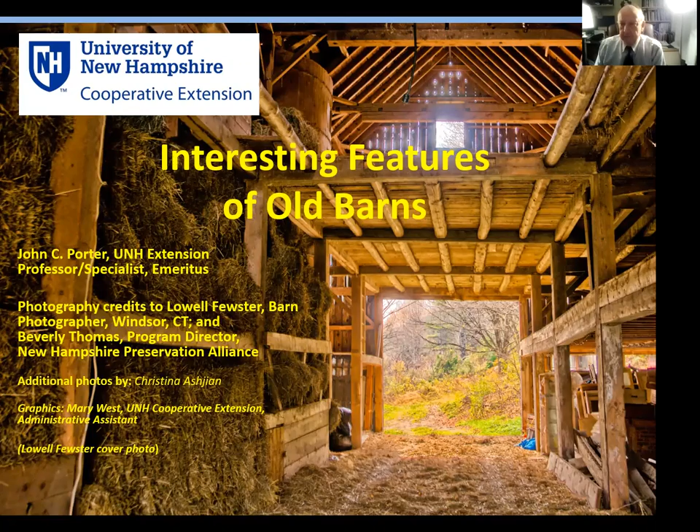People, as I gave my other lecture, were asking questions or looking puzzled about some of these things I talked about with barns, and I realized a lot of people hadn't seen the inside and didn't know some of these features. So I've split it up into some different categories, and I'm going to start with architectural features.

And you've got to start with the framework of what we call the bones. If we go into a barn, you just can't help but be impressed with the framework, the size, the scale, the beams. These were very ruggedly built.

They were overbuilt. In fact, some people wondered why they used such big timbers. But I think one reason was it meant you didn't have to hew so much, because they were dealing with big lumber when they came to this region. Big timbers meant less hewing, and so they used these big structures.

They built bents, that's what these units are called. Every 12 foot, there'd be a vertical post and so forth. And it's just a tremendously strong structure. In fact, some of these could actually be moved, just by towing them as a box, because they were so tight.

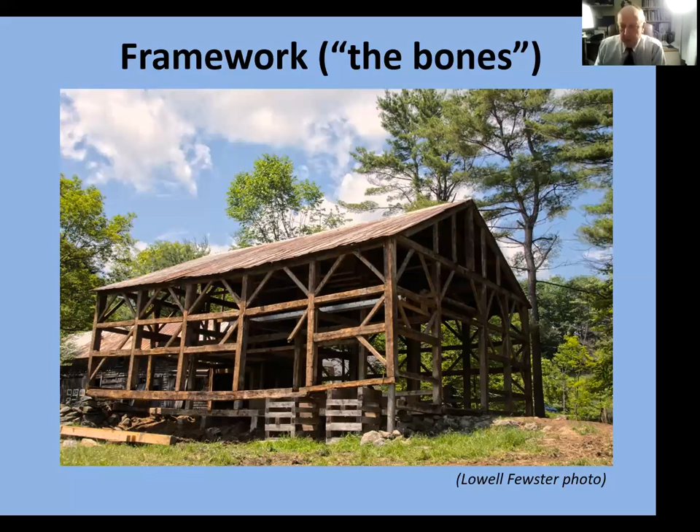Inside, on the side you're seeing here, the gunstock post, this is where they flared them out at the top, so they intersected with the roof members and the rafters. It gave more meat for the intersection of many members.

You had roof bracing that would support the structure. Every barn had its unique things, but basically the early barns had this post and beam. With the real early ones, you had the major rafters with purlins going horizontally and the boards going up and down. The one shown in this picture on roof bracing was a later barn, and this is what we call the common rafter, and now they're starting to put the boards horizontal.

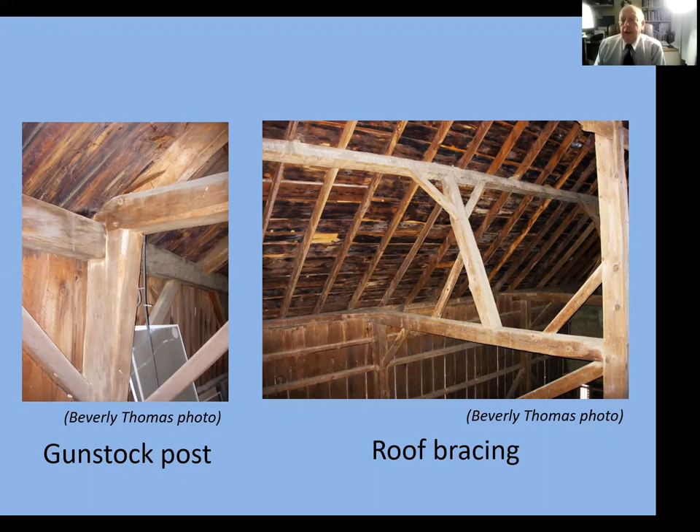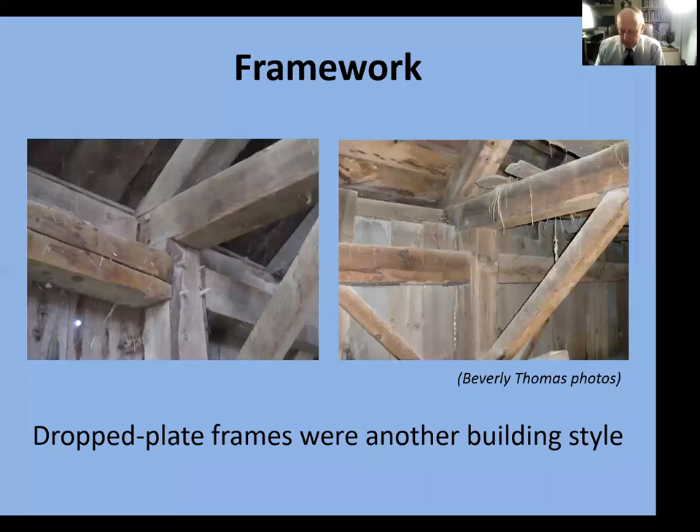Then they had what they call a drop plate. After the 1850s or so, they started having a little more decoration, a little bigger soffits, and by having the drop plate, a part of the rafter could stick out and create a soffit. As you'll notice, the real early barns, the rain almost ran straight down from the roof down the walls. Later they built these overhangs, and by having a drop plate, you could run the rafter out and create a soffit.

This is just a great picture here with that floor structure. Those are old pegs that held down some of the floor structure. On the side, you see some boards. A lot of times those boards are put up because they would thresh grain, and the boards keep the grain in the floor, not going into the haymow. Then you have these girts shown on the other side, the sidewall.

And again, just massive structures. The main points of support were under the major beams, but sometimes they put a solid stone wall all the way through.

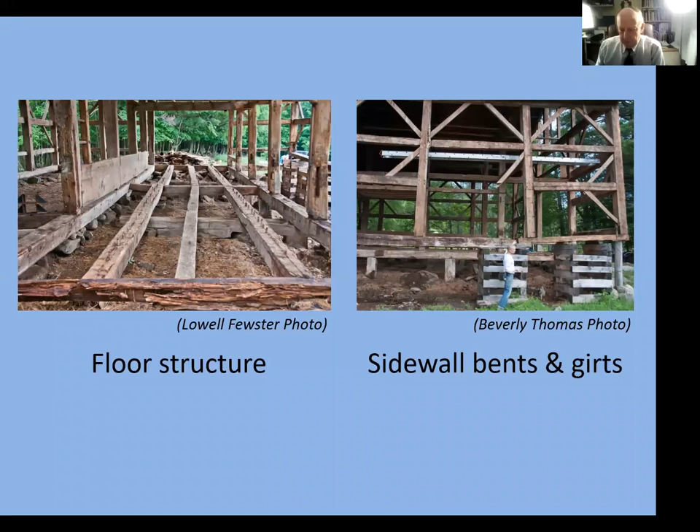Then you had the ridgepole—different builders had different styles. This ridgepole example has extra bracing, more than you often see. And when they put these together, they used marriage marks, Roman numerals, so they would know what joint and what beam went together.

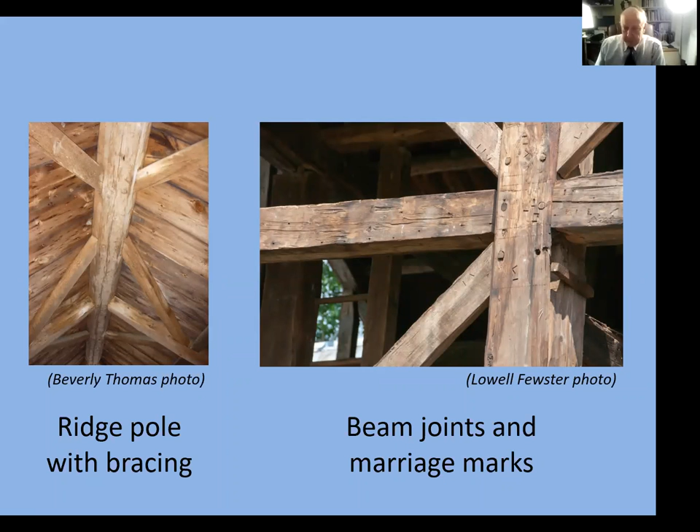A further sophistication of doors was the pocket door, very practical in New England. It sits inside and rolls inside, which means you have to design for it, because normally there'd be a big support timber where that door is. So they either carved out the beam or set it back 4 inches to run the doors. Often the door had a little wheel on the bottom front corner, on each corner, so they rolled easily—really nice, and very little affected by the weather.

Cow doors usually had just a single opening, usually in the corner, sometimes in two corners. Sometimes the barn would be divided in half, with heifers on one side and cows on the other, and this would allow the cows to go in and out. In those early days, cows usually got just a couple of chances to go out a day to get water—we didn't have running water in the barn—so twice a day the cows would go out these barn doors to a water tub.

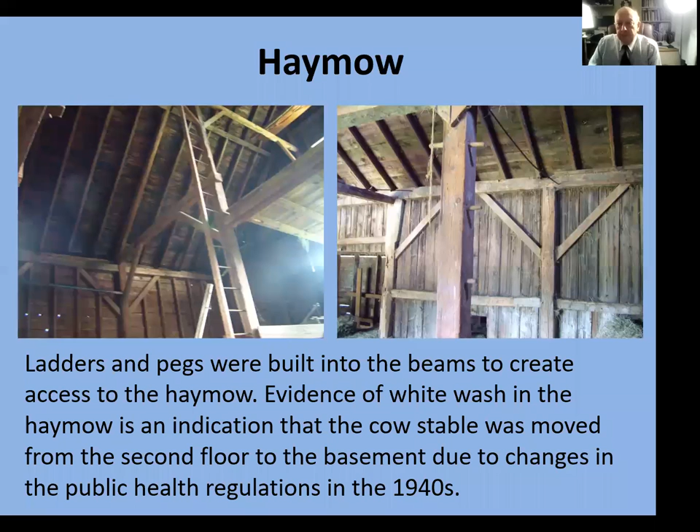Up in the haymow, above, you'd have what we call the flying scaffold. Earlier, this was like your extra hay you put in last, but when the hay fork came in, it actually served as a delivery area for pitching down to the hay mow. So you would drop the hay down onto the flying scaffold and then pitch it down, making use of gravity.

There are a lot of different ways of having hay holes to get this hay pitched down. If you had a second floor, you'd need trap doors or some kind of framework, because the loose hay would be gathering around things, and you had to keep areas open to pitch the hay.

I mentioned the hay fork — that was a pretty big deal when it came through. A lot of these were built by the Louden Hay Fork Company in Iowa, which claimed to have had hundreds of thousands of these all through the country. You had a track up in the barn, and sometimes when that came through, people cut braces and posts out of their barn to fit them in, which was kind of the downfall of some roofs, because it weakened the barn, but it was in the way of the hay fork.

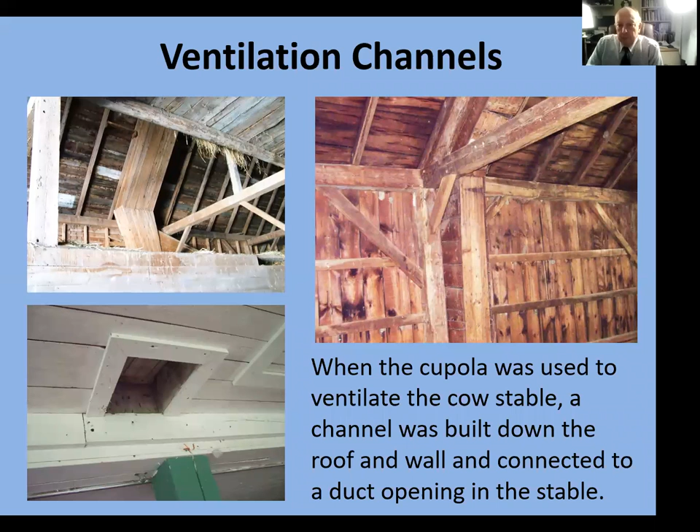Okay, I just call this other section accessory features. That's kind of a simple thing, but stairways - you'll always notice in barns, stairways tend to be narrow and steep. I think the reason is they didn't want to waste space, because they had too much rise over run it would spread out and eat up a lot of space. They always had little steps and narrow.

They either went down to the basement or the second floor, or they sometimes led up into the cupola. Most of them had a way to get to the cupola, and I think people used to view from there, and they seem to like to go up there to check things out, and probably for maintenance and opening and closing windows.

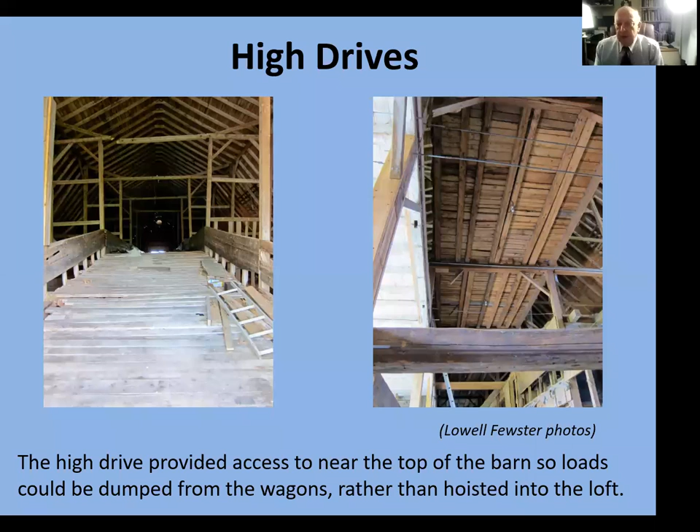Another term, a windlass. And you may notice a lot of these are naval terms. I think it's because barns and ships were probably the two biggest things being built back in those early days, and so a lot of the things in barns used naval terms. Windlasses were common in barns for lifting heavy objects. They often used it to change the hay wagon body off from the wheels, or to lift a butchered animal up for skinning and butchering and so forth.

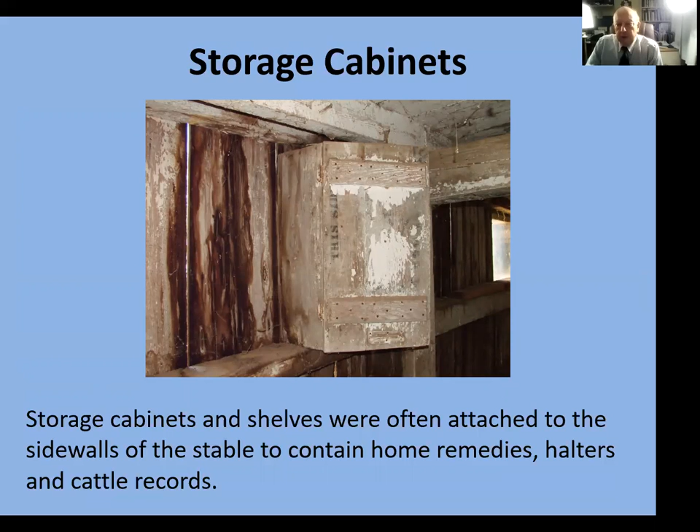Okay, I want to keep moving along here. I know things go kind of long when you're looking at Zoom, but we're getting toward the end. And a topic I call barn modifications.

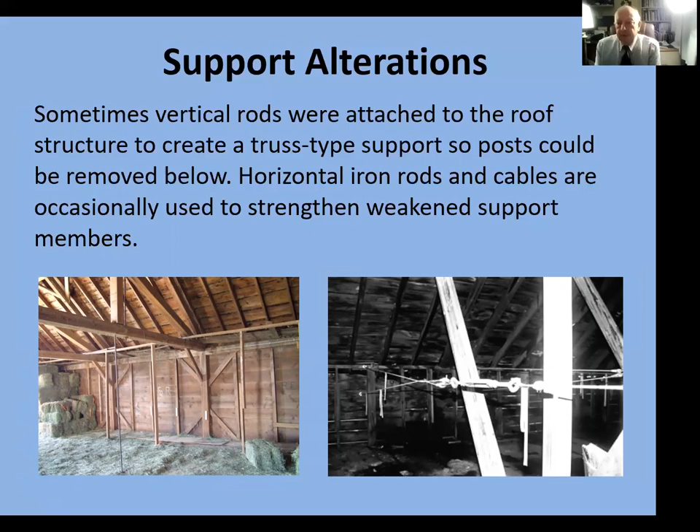This is an example of that internal truss you would build if you were removing downstairs posts. There are some barns that were actually built this way, with rods going clear to the roof. There's a barn in Chichester, New Hampshire, that has no posts in the entire basement—it's all rods going to the ceiling. There are some of these barns around the state; they would construct a truss over where the posts would have been, then run the rods down, based on the truss system we use now for building houses and barns.

This was especially done in livery barns. There was a livery barn in Durham that served students years ago, and they wanted to be able to turn the wagons and horses, so they put these trusses in. This one here is over a carriage shed as well.